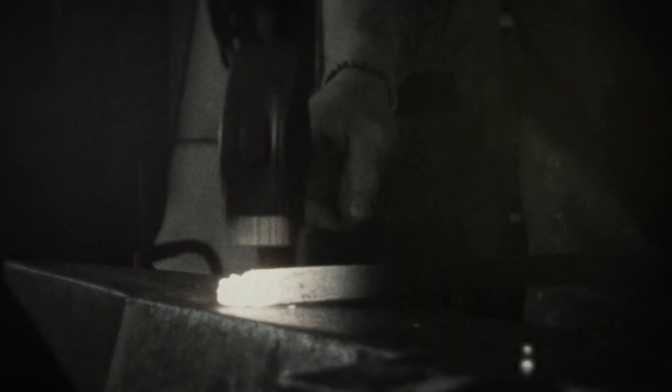The forge, an anvil, two columnar fret saws, and basic equipment. This is the beginning of a story with deep roots, linked to family values firmly intertwined with those of the surrounding area. From the first small workshop for iron processing in the center of Cuneo, to the shed in Via Castellani, to the production facility in San Defendente di Cervasca.

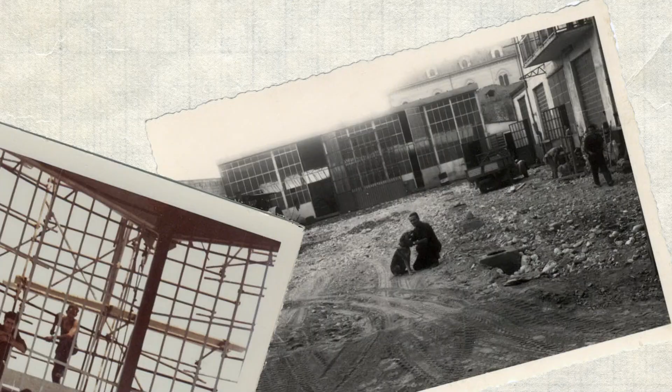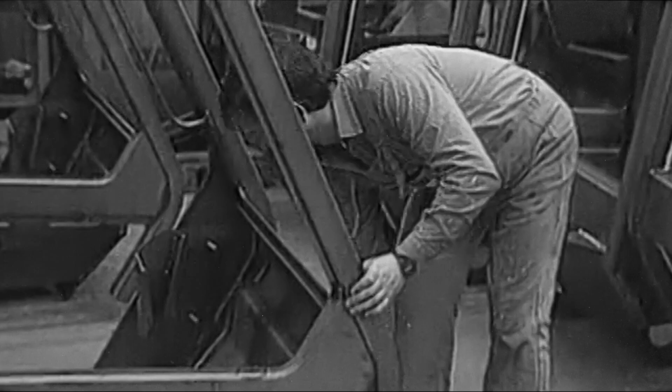Courage to dare. In the choice of two siblings, Natalina and Amilcare Merlo, with the fundamental contribution of Amilcare's wife, Denise, who together resumed the tradition handed down by their father, Giuseppe Merlo, known as Pini, founding Merlo EC SNC in 1964.

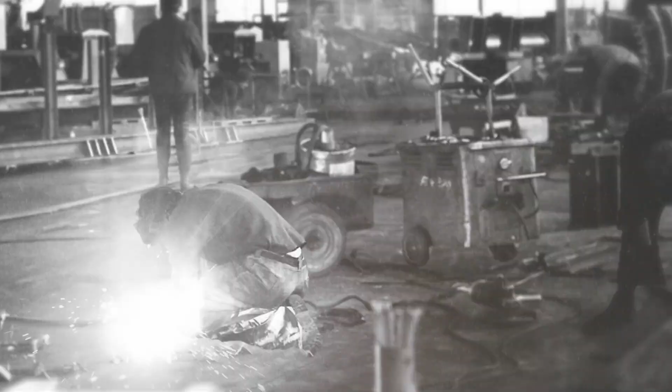A visionary choice, an important investment, which marked forever the passage from the artisan to the industrial dimension. An evolution focused on innovation, creation, and diversification, moving from the assembly of solutions for local industries to the production of specific machinery to attract new customers.

The courage to dare, in the 1960s, turned into an economic boom and created an ever-increasing demand for DMs and DBMs, which drove the company's success in an unprecedented sales race, opening up business even beyond the borders.

These were years of great achievements, and towards the end of the 1960s, Merlo products made their triumphant entry into France, as well as the Middle East, Cuba, and Nicaragua.

Difficult years followed for Italy, and even the Cuneo factory had to face a serious roof collapse caused by a massive snowfall, which made the plant unfit for use.

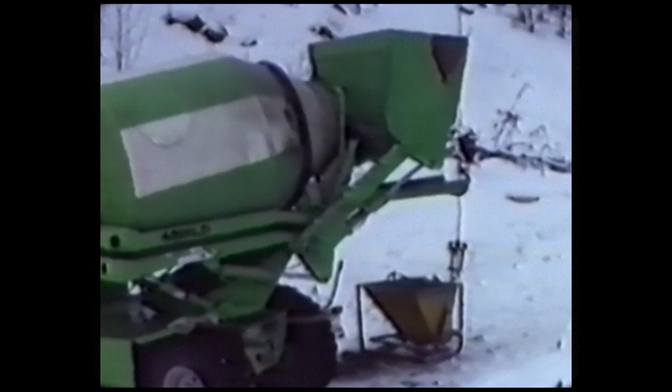Yet they didn't lose heart, and they held on to the spirit of unity built up in the company. Managers and employees joined forces without giving up, and in just one week, production restarted. The factory was saved, as were the jobs.

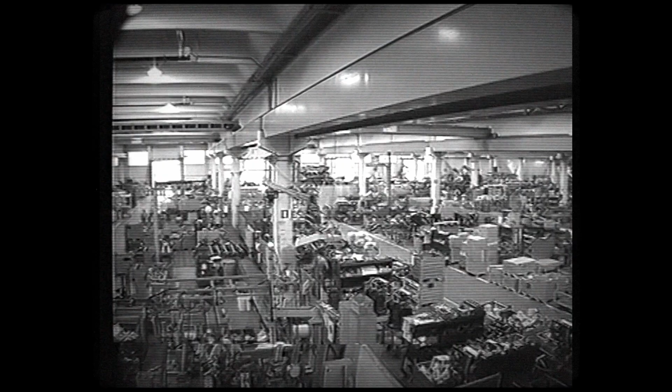But the company had to face a new challenge straight away: an order for 100 or so concrete mixers destined for a cooperative of producers in Iran, paid for in pistachio stocks.

A difficult choice, a rapidly expanding market. The cement mixers were delivered, the pistachios came in and were promptly sold in the United States.

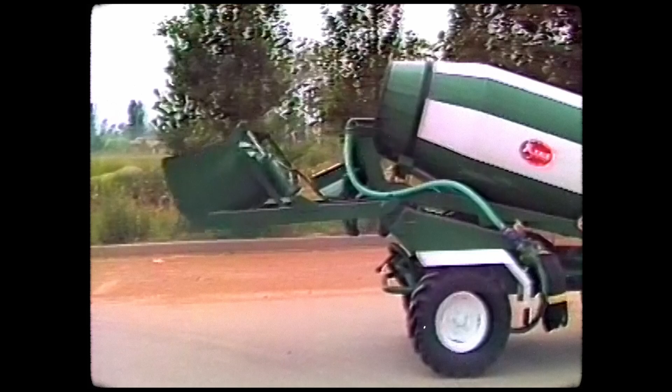The courage to dare of a company that keeps on experimenting. Every product that leaves the Merlo plants becomes the basis for the next innovation.

Accompanying historical changes, anticipating trends and production methods. Hundreds of patents were filed, certifying the company's character and defending those innovations that are still the basis of telehandlers today.

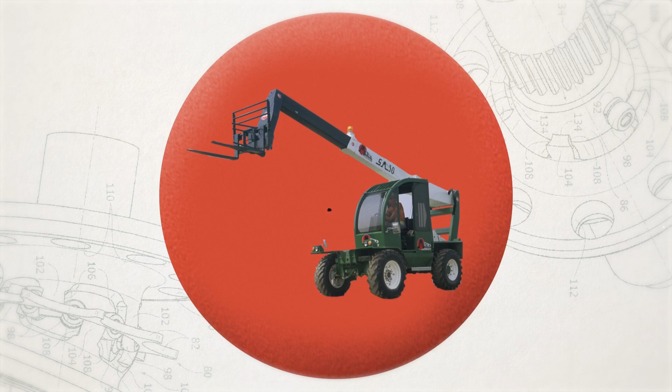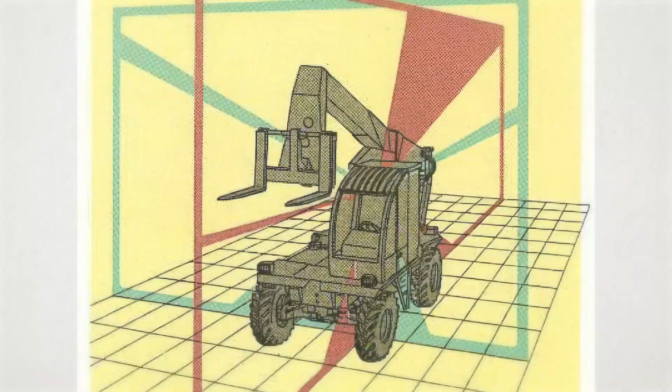Then, in 1981, the SM30 was born, the first Merlo telehandler. Its prototype could not have been ready in time to be exposed at the trade fair, but such a big revolution could not bend to the dictates of the time.

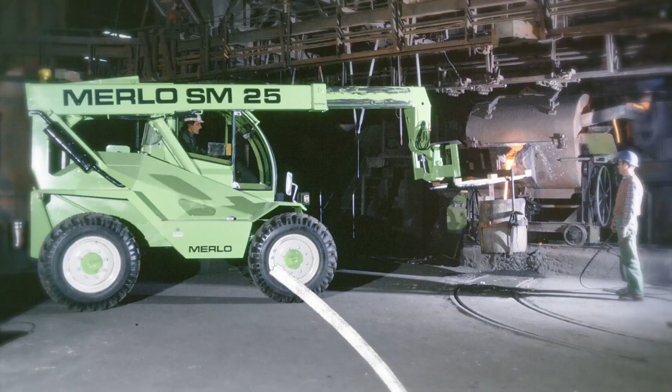It had to be shown to the world as soon as possible. So, with the help of a carpenter, the four mudguards are made, painted, and fitted. From a distance, the illusion works perfectly.

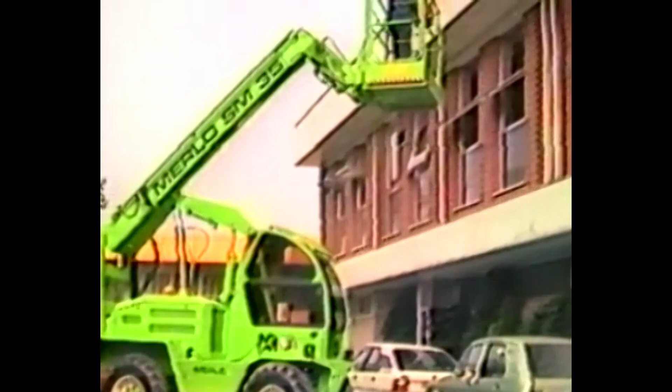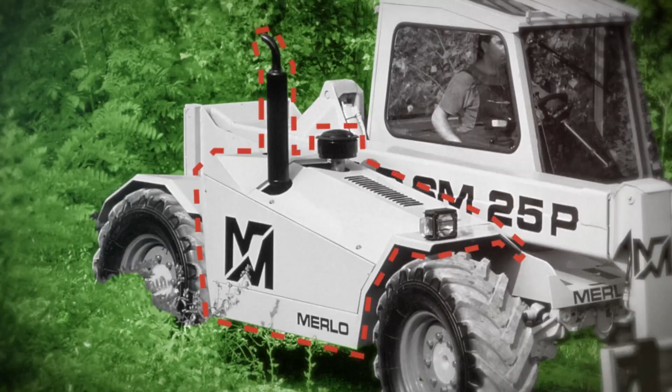Up close, the competitors do not immediately grasp the extent of the novelty, leaving Merlo with a considerable lead time to continue innovating. The courage to dare shapes the material by moving the SM30's engine sideways to allow the telescopic boom to be positioned lower.

The Panoramic was born, the first model in the world to leave the operator with an unobstructed view of all sides. A significant step forward in both comfort and safety.

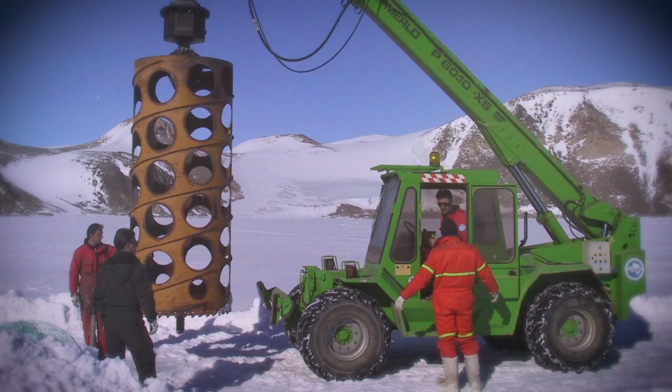A product so iconic that it became the standard copied and pursued by all Merlo competitors. It was during these years that the decision was made to make each of the company's machines instantly recognizable.

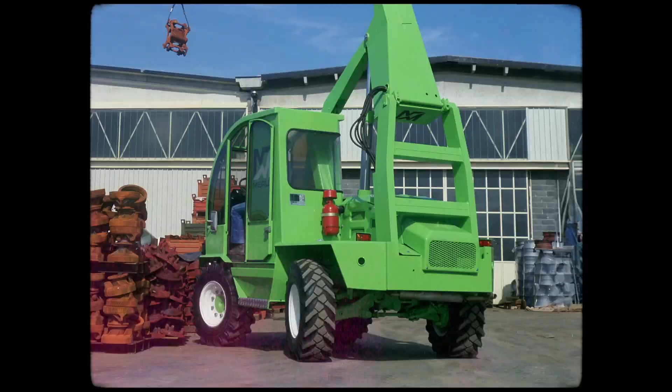Both the group's new logo, which tenaciously resists the inexorable passage of time, and the characteristic Merlo green, created in collaboration with Polish architect Jacek Popek, are institutionalized.

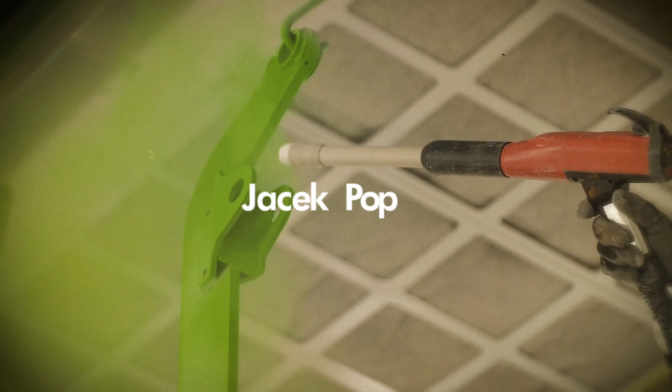The company continued to grow in the construction sector, reshaped the material, creating a new world premiere with the introduction of the roto range. It entered the agricultural sector with the turbo farmer, and the ecology and urban waste management sector with the acquisition of the Tecnoindustrie brand.

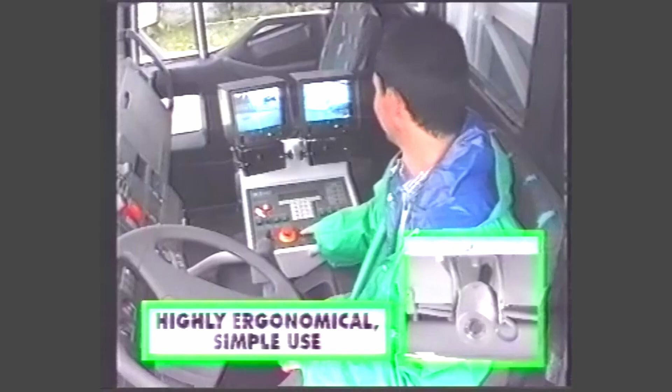The company began as a small workshop, and since then it never stopped expanding in every direction, becoming an international benchmark for the metalworking industry.

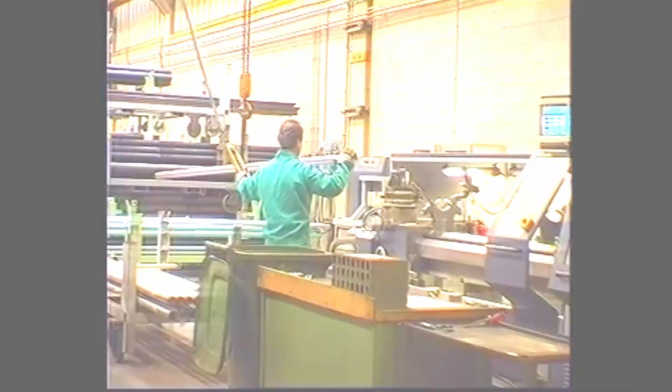New companies were born within the group, specializing in basically any field, from the production of components and composite materials to training, through to research and development of new technologies in both hardware and software.

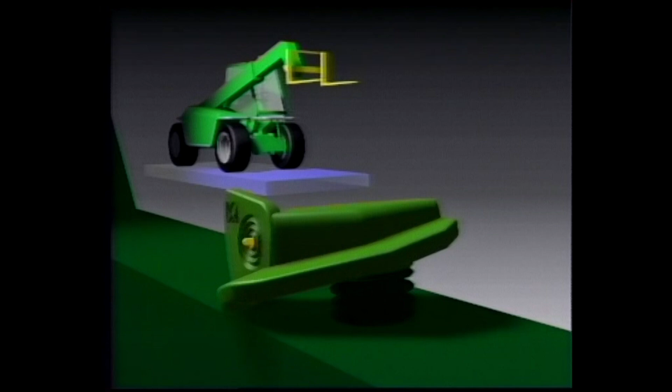A counter-tendency verticalization that has allowed the group to produce more than 90% of its components in-house, managing to create an indissoluble link with the territory through professionalization and employment.

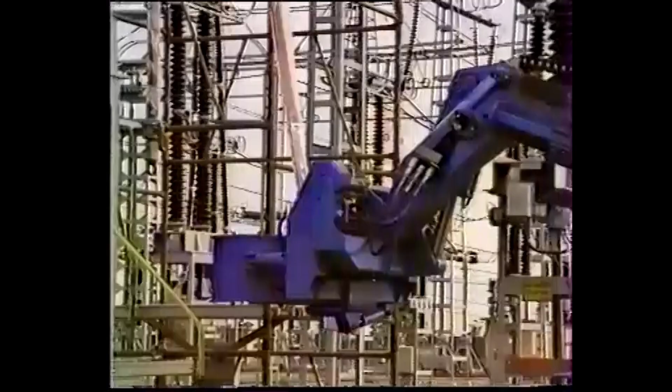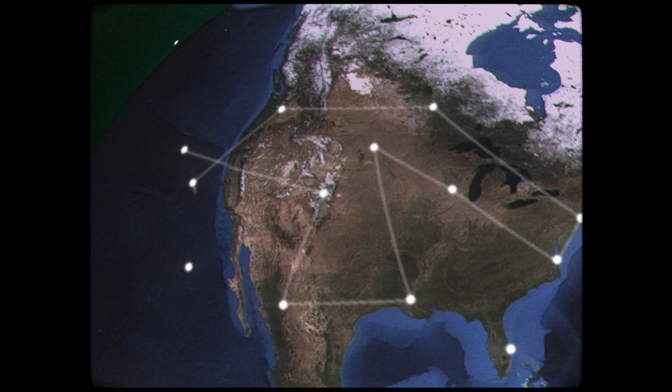The courage to dare without ceasing to innovate. In the newborn, hyper-connected world of the 2000s, product excellence must go hand in hand with a constant drive for innovation. Thus, the multi-farmer was conceived, a true milestone for innovation in the agricultural sector.

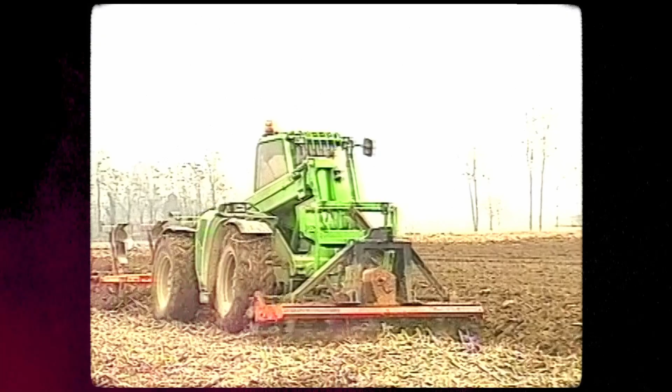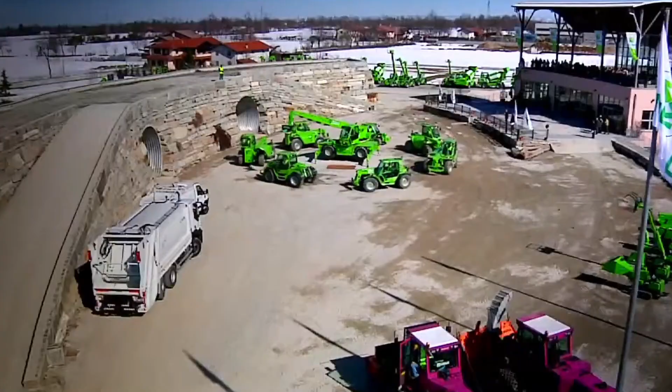At the same time, the desire to maintain a very high level of professionalism within the company and its sales network, and to train the end customer how to make a conscious use of operating machines, led to the inauguration of the Merlo Training and Research Center, an excellence at an international level.

The courage to dare, up to a Guinness World Record. The Finnish Leo Turkiev, to celebrate his retirement, decided not only to get the company logo tattooed, but to drive the entire 4,300-kilometer route between Cuneo and Tampere at the wheel of a P25.6 telehandler.

Across Italy, Slovenia, Hungary, Slovakia, the Czech Republic, Germany, Denmark, Sweden, until the arrival in Finland, for 43 days at 36 kilometers per hour. Leo showed the whole of Europe a machine that's not only extremely reliable and resistant, but a company that stands for community, family, and values all over the world.

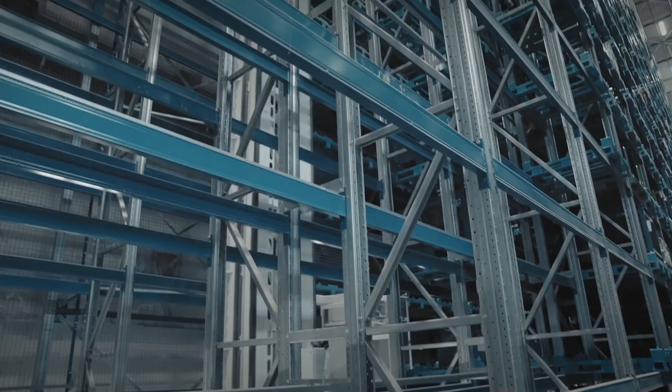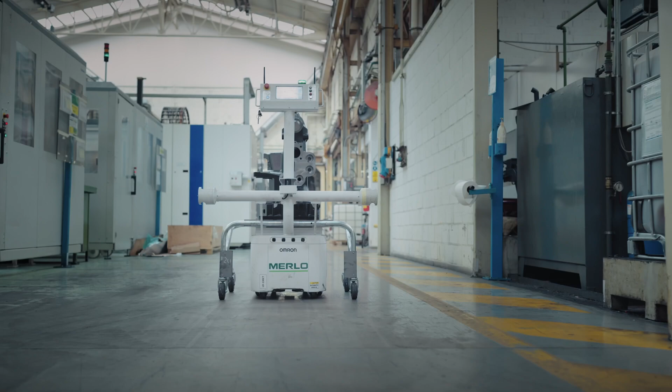The courage to dare is renewed once again in an ecological and technological vision, combining artisan quality with modernity. The last few years have seen the Merlo Research Center focus on the implementation of electric power.

First, by developing hybrid models such as the T40.7 hybrid, up to the revolutionary e-worker and the 43.7 full electric.

A new future is opening up, paving the way for developments in new application areas and new energy sources yet to be explored. For a century, Merlo has accompanied the changes in the country and the society, remaining faithful to its approach as a family-run company.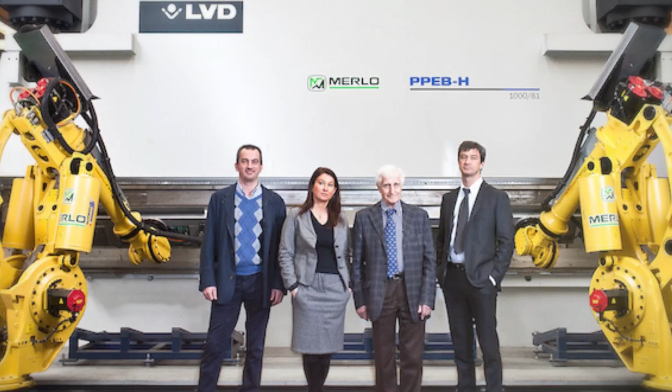Solid roots, an eye to the future, a daring spirit, and the right amount of courage are the ingredients that have guided the company towards constant growth.

Dare anything that's possible, because who doesn't dare won't achieve anything.